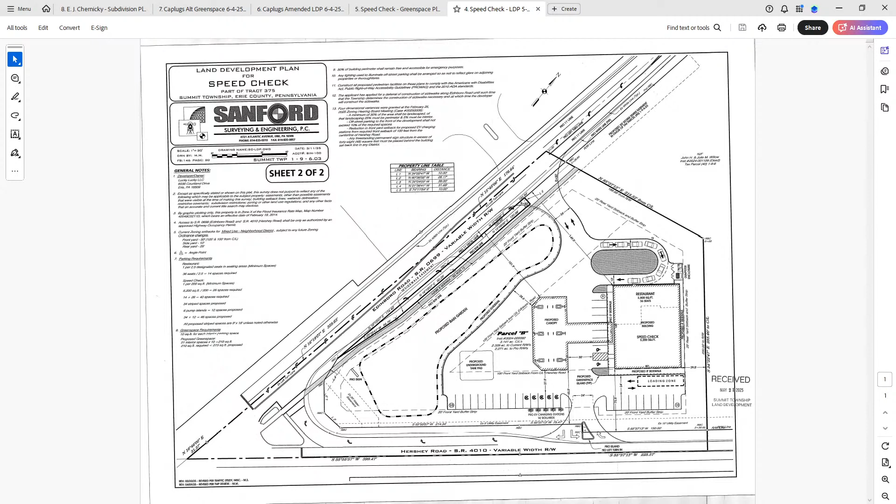Any other questions or comments from the board? Well, I want to understand where exactly we're at. Mike, you mentioned earlier that you were waiting on something from environmental? No, I mentioned we received approval by the Conservation District for the NPDES and E&S plans. And then sewage is the other outstanding aspect.

The sewer authority, we have our planning module approval, so we know it can be extended. We're just working with the sewer authority on which sewer extension option. There's 3 viable options, and it comes down to the sewer authority having this plan of taking the sewer other places that's way beyond this property, while Bill Steff has ideas of wanting it to get there, therefore needing the sewer this deep. So we've given them 3 options, and we're waiting for them to tell us which option they want us to do.

Is it safe to say that's just a matter of picking an option? Absolutely, yes. All three are viable, all three are perfectly engineered, totally legitimate options. It just is which the sewer authority wants to participate. Lucky Singh could extend the sewer to serve himself and be totally happy, but Bill Steff thinks that's short-sighted because he wants to take advantage of this project. What if we put the sewer a little deeper? What if we, and the sewer authority wants to contribute to that, and they say, if we pay a little extra and the sewer can get a little deeper, then we can reach further in the township. So yeah, they're all perfectly viable options.

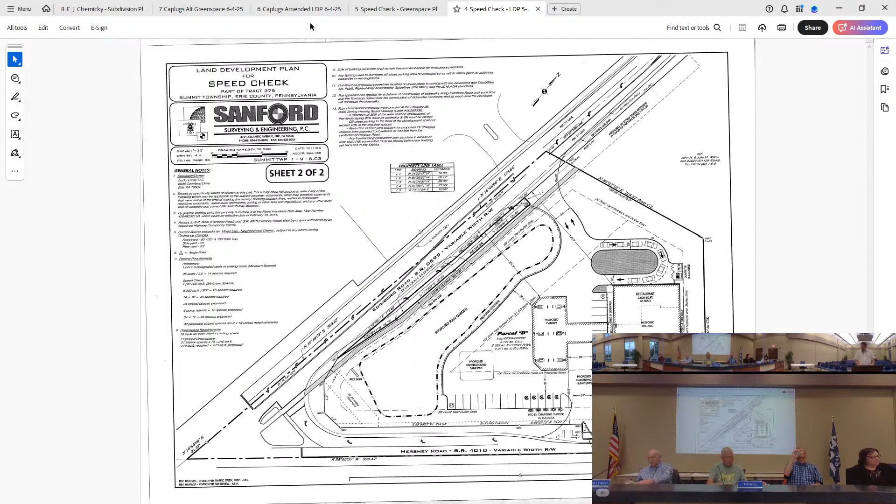Next on the agenda is the green space for the same property. And I'll be honest, I don't believe this is an alternate plan. I believe this is a compliant plan, and I know your board really only reviews and approves alternate plans. I'm happy to present this. Maybe that's the reason it's on the agenda. I mean, we present alternate plans all the time, don't get me wrong.

But we believe this is a compliant plan, with the exception that we got a variance from the zoning hearing board to reduce the internal plantings from what the ordinance requires. So I'm happy to present the plan, whether you guys feel this is an alternate or a compliant plan that doesn't necessarily need action. My opinion is you need to add some plantings on that Hershey Road side.

We've got a neighborhood right there, and I'm sure they're going to get blasted with lights and noise, so something to screen that business from across the street. What are the plants going along the Hershey side, do you know? Yeah, we have it on our schedule here. It's not that big, green junipers and deciduous trees.

We gave a mixture of 5 different deciduous tree choices that could go there, and the ordinance requires them along the entire perimeter to be spaced at, I can't remember if it's 30 or 40 feet, and then in between there we have to have shrubbery.

So we have a combination of deciduous trees, 5 varieties called for, each 8 foot tall at time of planting. And then we have sea green junipers, 2 foot at the time of planting. How tall do they end up? Junipers get probably about 4 foot tall.

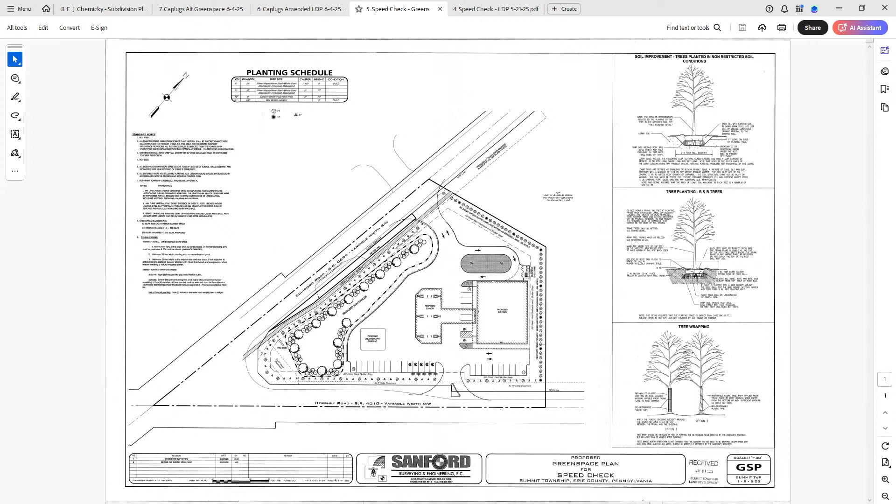Good evening, I'm Steve Kopak with David Laird Associates, 1557 West 26th Street. In front of you tonight is the Caplugs Land Development Plan. We're looking to put about an 82,000 square foot warehouse addition on their existing facility. We were here last month, met with the zoning hearing board, and received 2 variances for additional parking out front and lost my train of thought.

And the use - sorry, I was having a brain fart there. Yeah, what was the other variance for? And to put it in an area that's now not zoned for the use that's already existing, so we had to obtain a variance to get the use for that facility to be installed.

The stormwater management, E&S, planting plan, NPDES permit - all of that has been submitted to the various authorities. Matt has reviewed the stormwater plan and provided some comments.

We've resubmitted with some of those comments being addressed. He provided a couple other email comments the other day and we're taking care of those. Any comments you have tonight, I'll address those as well and submit one last package of information, hopefully to get that taken care of. We're still waiting on the NPDES permit.

The sewer authority, we've emailed and been back and forth with them. It's going to be an internal connection for the warehouse, and they don't expect to bring too many more people online to run it. They currently warehouse off-site, so the people that load the trucks and send them off to 18th Street are going to stay here and load the warehouse instead. So they don't anticipate a bunch more sewage flows - it'll just be an internal connection, a couple bathrooms - and we won't be seeking any exemption or sewer module for that.

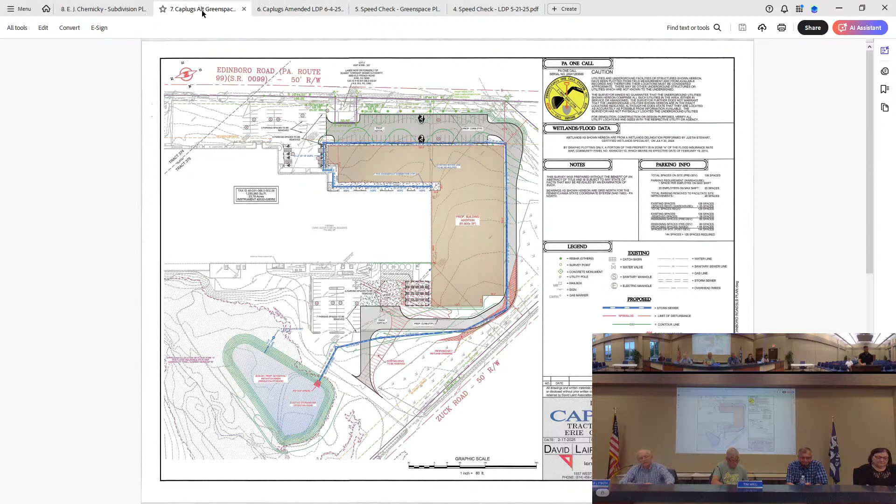Next is our green space. We presented an alternate green space plan, planting some lower growing holly along Edinboro Road, and then a couple of locust trees in the island. The grade kind of falls off from the road down into the parking lot too, so it'll also help deflect any parking lighting.

Primarily we're just gonna leave everything to the south as it is. It's pretty grown up to the south, you'll see there's some wetlands there. We're gonna get a GP permit to cross the wetland, but primarily avoid any impacts to the wetland. And you're leaving the wooded area? Yeah, that's all untouched over there. It's outside of our limit of disturbance. We don't plan on even heading over that way.

Should that be noted on the plan somewhere? I don't see it on here. They have another environmentally sensitive plan that shows all of that. And this, the way the mixed-use neighborhood is, they're required to have, I can't remember the percentages, like 25% vegetative cover throughout, so much percentage around. They have a map showing all of that, a small one here if you'd like to see it. I just wanted to make sure it was known.

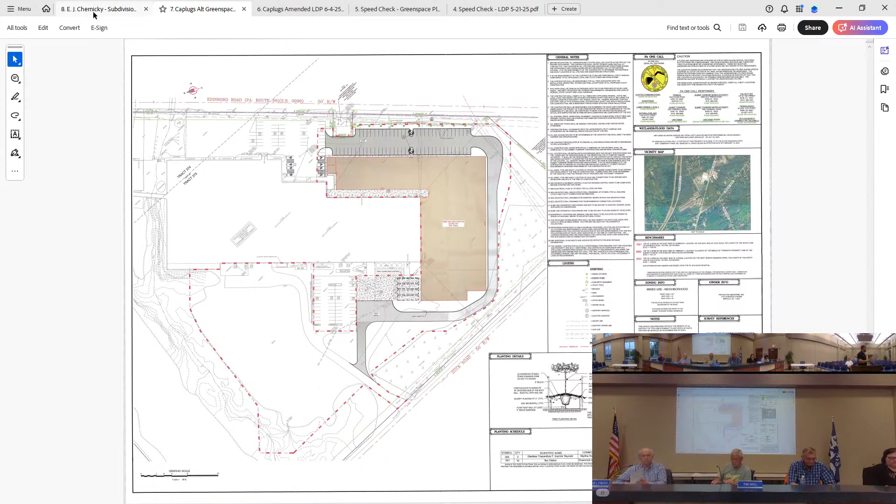Next is E.J. Chemicky's subdivision plan. Hello again. E.J. Chemicky owns this property on Flower Road, and he would like to subdivide basically one tax lot into 3, creating 2 new lots, with the 2 smaller lots in the front.

Matt Jonas had a couple of review comments, and we addressed those by adding the required drainage easements. I also provided Matt an additional drawing and justification for why the lot lines are not perpendicular or radial. It has to do with the existing driveway that goes back to the residue and crosses over the little creek there. That driveway set the north line of Lot 2, and for simplicity I made the south line of Lot 1 parallel to that.

So just here today, we are working with the sewer authority to extend the public sewer. It'll be a low pressure sewer, but these lots would be public sewer, and each home would get a grinder pump since it's gotta be pressurized. You can't get to that lift station across the road? No, it's up gradient, so we need to pump uphill to let it drain back. Gotta love it. Yeah, that's kind of a bummer, but yeah.

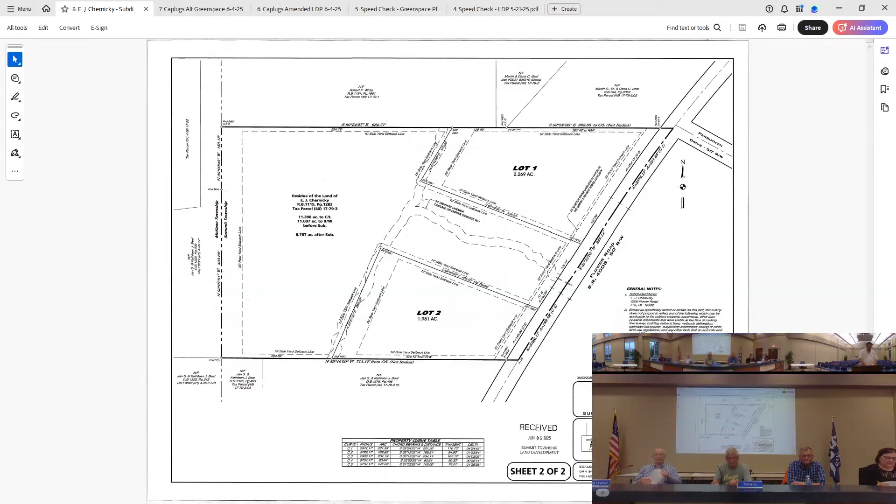Can I ask you a question, I know we already voted on it, about the speed check green space? I hear you about blocking headlights, and I was thinking, what are the grades, is our site down a little lower? I don't mind just doing arborvitae, I'm not going to argue. Or if we did a little mound with evergreen plantings on top, would we accomplish the 4 to 6 feet total? I'm not saying I want arborvitae, I'm just asking, is there an option?

I think that's kind of realistic. The means and the method are up to you and the developer.

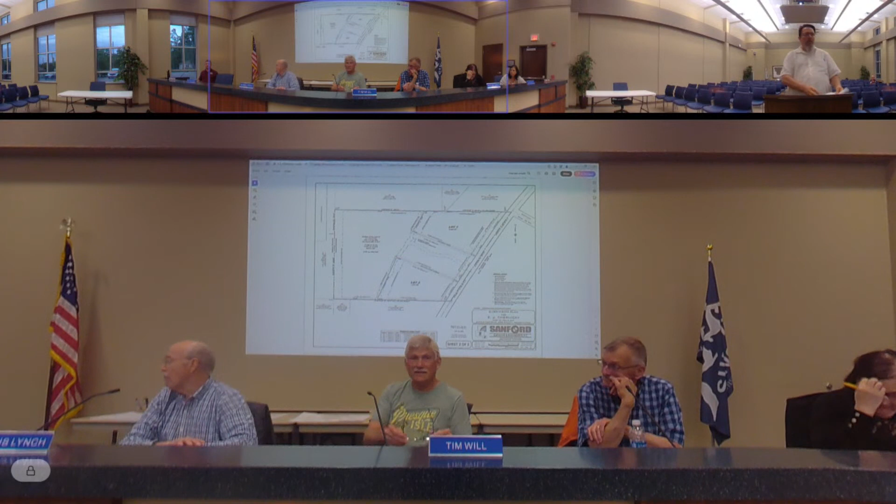Right, I do too, because they're going to have to cut the grass. Sometimes introducing a mound makes it more time consuming to cut grass, you're going like this down the slope, you know.

But I guess the question is, is topsoil on the site a good place to put it? Everybody knows he's going to raise the net height with a mound and a shorter plant compared to just a taller plant on level ground. That's what the question is.

And I think Steve Kopeck said it well, the Caplugs site is out a little lower than the road, so the headlights, I just can't think right now if my site is a little lower than the road or not. It's not higher, is what I'm saying. And so if we're a foot or so lower, if we did a 2-foot mound and 2-foot plants, we'd get that 4 to 6 foot.

I think the noise and the lights are, at least in my opinion, the reason. Yeah, if you have a mound that bounces sound up, that's one of the ways you can fix sound, if it's a high enough mound. So I just wanted to give them some options. Okay, thank you.

Yep, thank you. Thanks, see you later. Take care, Mike, we'll see you.

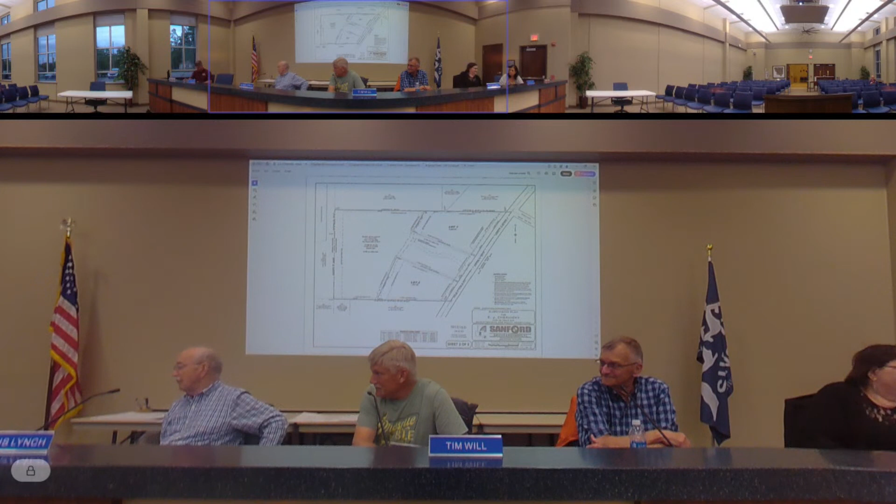Next on our agenda is comprehensive plan implementation updates. Is that you, Matt? Yeah, I don't really have a whole lot. A quick update on Downs Drive, it went out for bid, Lindy got the contract. It was around...

Our guys have already done a drainage project over there. Last week you probably saw all the congestion over there for that. We're going to go in probably after they're done paving to remove the excess asphalt. Then it'll be wider boulevards and a 2-lane road with dedicated left turn lanes. That'd be nice, a little more green space over there. So I think that's all I have really cooking at the moment.

Just a question, when do we start the next comprehensive plan process? I remember we went out for requests for bids, that was well before 2018, if I'm not mistaken. So yeah, we did it in 2018. They recommend making some amendments if possible within 10 years.

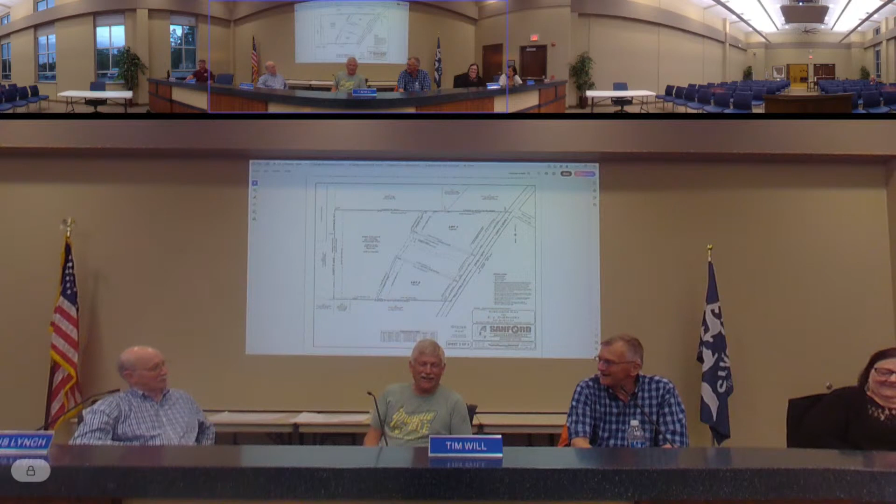I was just wondering, just thinking, 2018, wow, that was a long time ago. I just wanted to bring it up, okay, there it is, we can forget about it now for another year or so. I just thought I'd bring it up, that's all.

Other business? Nothing. How about public comment? You got anything to say out there?

You're good, okay. Then I need a motion for adjournment. I move we adjourn. I'll second. Discussion? Aye. Aye. Okay, good. Thank you. Anything to sign?